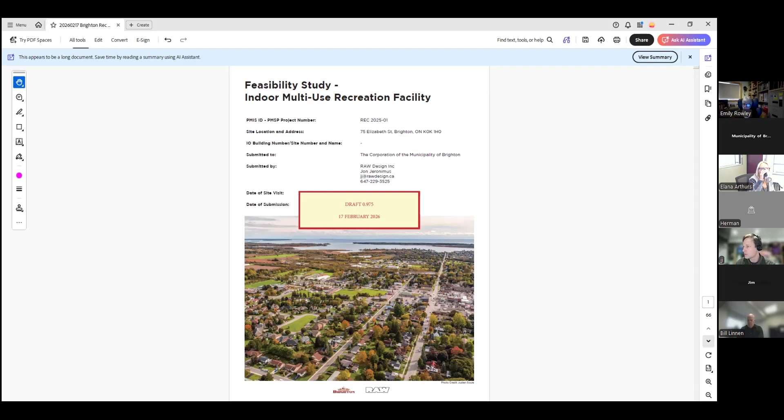Taking you through this report here, I'm going to go to the sections that have changed. Here's the 4.3 parking and site circulation section. We don't need to read that together right now. I think the highest value for us together is to look at the concepts and the money parts, okay? So just flipping through the report, we'll blow it up when it makes sense, just continuing through it.

I highlighted with some purple stuff, small sections that have been updated. For example, we had to do a better job of describing the indoor walking track as a potential area in the facility, so we've done that. Same with the elevator stuff for accessibility, and same with phasing, which we've talked about. If anybody ever wants to stop as we're going through this, please chime in, because otherwise I'm going to direct us to the areas that I think are the most important.

Even the YMCA stuff, we added a little piece of language to say any partnership model needs clear terms on governance, cost allocation, risk management, and overall transparency, based on our last conversation. I know that was an item that you raised, Emily, which I thought was a good item.

The functional program table, we haven't really adjusted. I think we still have to tweak a couple things in here, but the intent of this is really just to show here's what we think the need is.

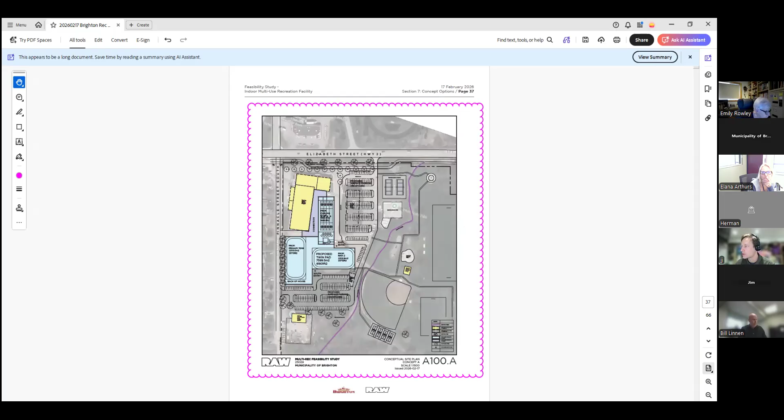Okay, concept options we're going to get into here. This might seem a little bit grainy in the report, but what I want to share, you guys can all see this, of course. We're going to talk about the concepts as they've evolved.

So let's start with this concept option number A, and we've actually since issuing this yesterday, we've added a couple more things. One thing we spoke about last time was, okay, the twin pads need to be shown. How do those work on the site? And how does the curling club really fit on the site?

So we've taken a 4-sheet curling club layout—and maybe just to back up, this is just a feasibility study that we're doing here, right? So the point of this exercise in mapping things out on the site is just to show how feasible these spaces and these rooms might be on the site. What does it generate for parking, and how does that work? There will be a whole design process where people will do an actual design. So I don't want us to get too tied into the nuances of how this building might function. It's purely feasibility analysis, okay?

So what we imagined was, okay, we've got the existing curling club in this dashed line. Imagine phase 1 is the light blue here. Imagine you move the ball diamond, which we've always talked about—we need that space. Move the ball diamond, there's room for it over on the other side of the site. And you build this kind of unusual shape here to fit the new proposed curling club in between the existing curling club and the existing arena. And then you have a twin pad built on the back. We've got roughly 10 meters between the existing building and the new building.

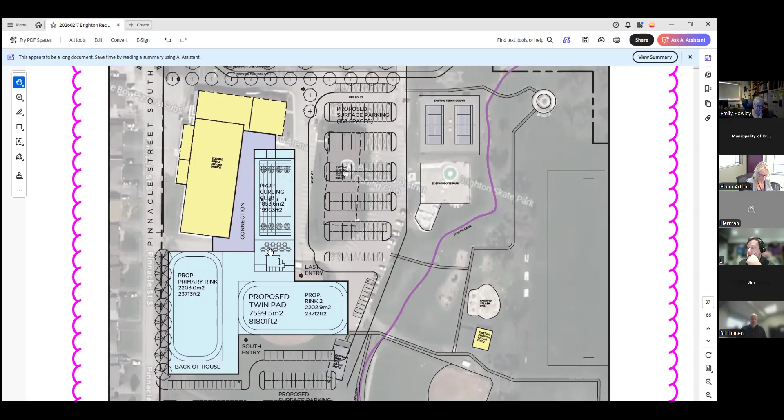What I like about this is, imagine the curling club's lounge can be worked into an overall lounge, where this becomes the central node where you can observe and be part of the life of these other sports and activities in the recreation center.

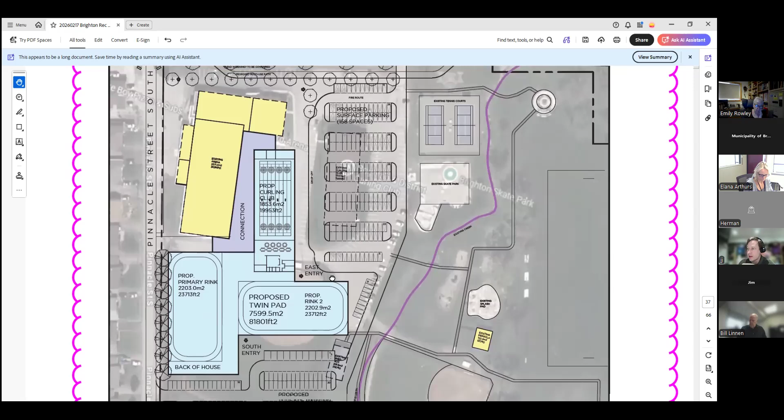And the existing building stays as is, with the opportunity to renovate as budget allows. We've broken that out. So with this scheme, I think we have something like almost 300 parking spaces versus the 190 that are currently there.

Can I step in for a minute here, Jon? Absolutely, yes Jim, go ahead. I was doing the numbers because of what we said last time, and I'm thinking of a busy day with 2 rinks going and a curling club tournament — that would take 264 spaces just for the participants.

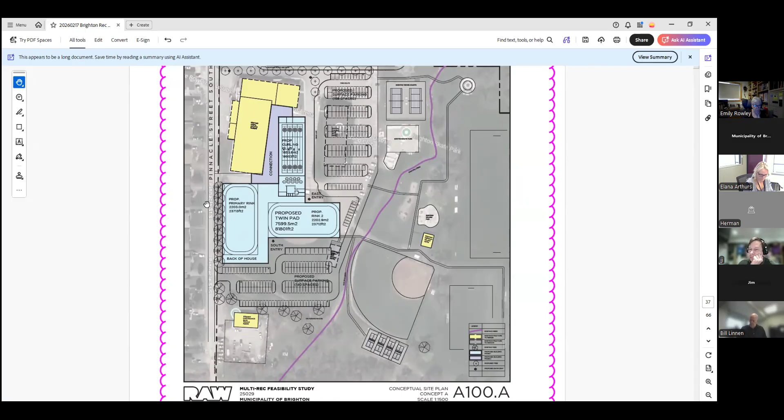Yeah, I mean, I hear what you're saying. The reality is I guess it means that 300 spaces will work based on your calculations, and you'll see in another scheme we get even more. But it's a good point, and we looked at how other arenas, how many parking spaces they have, and we spelled that out in the document, just why we think this can work. But to your point, it's going to be busy.

Are you saying, Jim, that you're concerned it's not enough spaces? Sorry, like 300? I think Jim just fell off the call. Oh, no, he was so mad about the parking that he just hung up. Yeah, okay, we'll get him. We'll sign him back in. So if we could just pause for a moment, because without him, we don't have quorum for the meeting. Okay.

Yep, all good. Jon, yeah Herman? I have other concerns. Never mind, I agree with your statement on the parallel rink surfaces.

But my concern is that you're showing parking to the east of the east-west rink, and just on the south of the north-south rink, which doesn't leave any spaces for servicing, for in-and-out traffic, for the ice equipment, for maintenance — you can't have parking all around the rinks. The north end of that rink will not be an option for refrigeration equipment, etc. So I'm a little concerned about the parking lined up just to the south of the one and just to the east of the second.

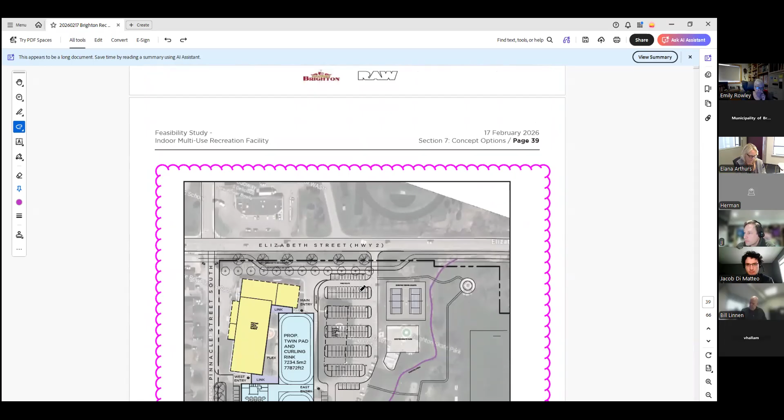Okay. Happy to reschedule if we need to, but maybe we give him a bit more time. I've offered for him to call me if he needs technical assistance, but I haven't heard back yet. I'm so tempted to just keep going, but I guess we shouldn't, hey? No, we should really wait, we shouldn't move forward without a quorum. Yeah, understood.

Herman, while we're waiting, did you get a chance to read through section 9? No, the one I received last night. I hadn't pulled up my laptop until this morning to get it set up for Zoom, and my problem with my eyesight and my cell phone is that it's all very fine, and no matter how large I make it, it's still difficult to read. Fair, we can go through it now.

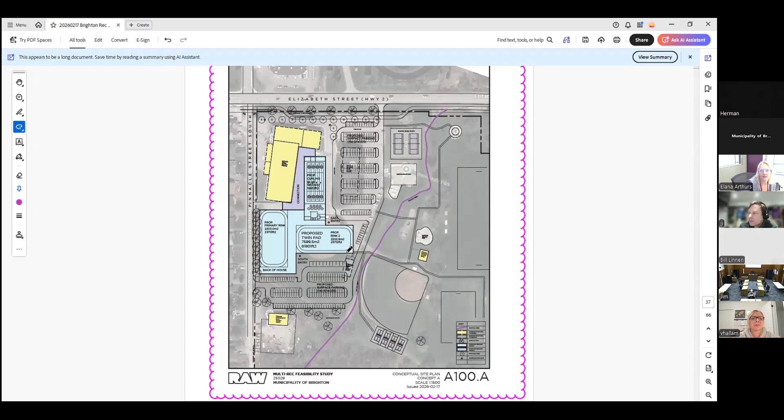Herman, are you back? I am, I never left. Rather than screwing around, I'll wait until I'm given the green light. Maybe we'll just wait a minute to see if Emily joins us. Did we lose Emily now? Well, she's there, I just don't know if she's back to the screen. I don't see her and she's on mute, so I want to make sure she's there before we get started.

I'm here, Jessica, sorry. Okay, excellent, all right, I was about to call you. We're good.

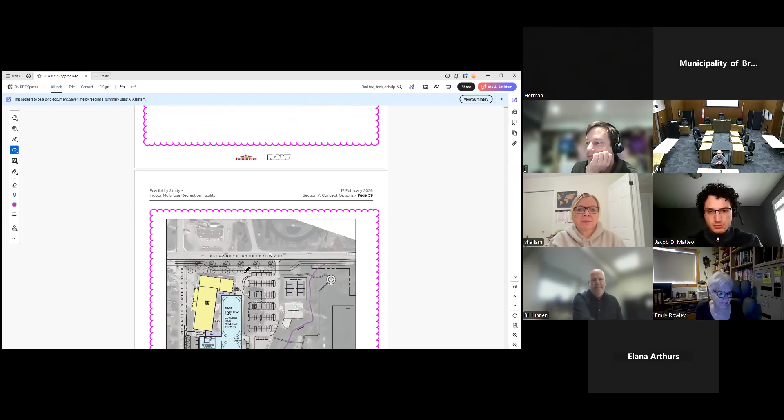So where we left off, we were talking about parking. Jim, while you were gone, you had mentioned your preliminary count of around 260 parking spaces required for a hockey tournament where both pads are being used. We were saying, okay, we've got 300, and there are going to be peak times where all these spaces are likely used. But what we're trying to do with this feasibility study is reflect the realities of what's required and what's possible on this site. From our research, we think 300 spaces is a good number to serve this type of facility, and we have some schemes where even more than 300 spaces are possible.

Herman raised the point that we've got to be mindful of the servicing requirements to these buildings, back of house stuff, loading, waste, all that stuff, which particularly in this scheme would be a bit problematic because of the location of some of these parking spaces that are flanking the conventional backs of the buildings where service spaces could be possible.

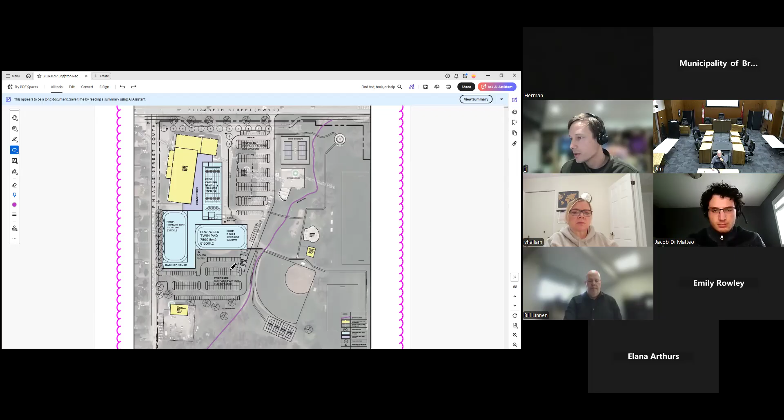But we kind of went over that by saying, look, this is a feasibility study, and we have to be careful about getting too far into the weeds of design. Our goal here is to show what is feasible with the number of parking spaces, overall building area, and zones of particular types of spaces in the multi-use recreational facility. So we kind of left it at that, knowing that the design is going to change and develop as this thing becomes real.

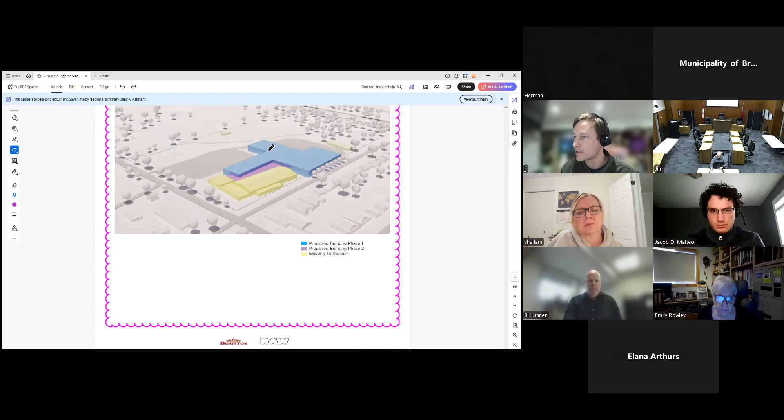So if it's okay, I'm going to keep moving along to show we've updated some 3D stuff. We'll continue to refine this. I know it's not really part of what we need to do in the feasibility study, but we think it's important to see in context in 3D what these shapes mean. And this is an unusual shape, and there's likely better ways of doing this, but feasibility wise, it could work.

We did another scheme, similar idea, with keeping the existing building, but showing a twin pad and a curling rink and what the resultant parking counts are. In this one, we've got the twin pads kind of back to back, but the same idea would apply. There's another option where the parking or the second pad is right beside this one, then you'd have this kind of arrangement.

Again, the feasibility of the remaining parking area is likely to be in the neighborhood of 300 spaces. Some could be here, some could be down here. It's just the organization of the space of the site. Can it achieve those goals? I think we're showing that yes, it can achieve the goal of twin pad, curling rink, existing building to remain, and 300 spaces.

I'll keep moving on unless there's any chiming in of thoughts. Here's another example of what that looks like in 3D without going too far into design.

And then we get to concept B, which is the one that has changed the most significantly. Last time in concept B, do you remember we had that civic court or civic square between the north piece of the building and the south piece of the building, which was cool, but it posed operational and efficiency challenges. So what we've done is we've reimagined concept B. Remember, concept B is the one where it's all new, where we phase the construction so it's all new.

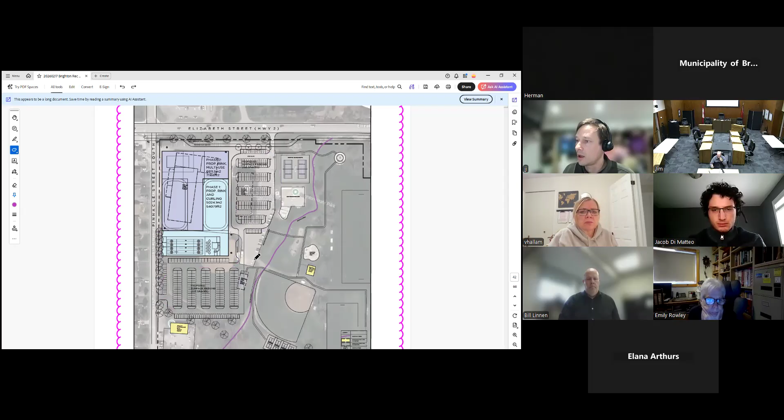Are there any questions as to the feasibility nature of concept B? Can you explain, John, where you've provided consideration for the YMCA, from a space perspective? When we talk about that extra space in the front, is there ample room there to put in things like offices or multi-use community space and the Y? Yeah, and I think that's a good question.

In this scheme, we haven't broken down into the specifics of design, but to give you a sense of scale, that rectangle is the size of a gym, like the size of a basketball court. The existing multi-purpose room is somewhere in this existing square. So there's a ton of space in this volume to have the in-skin, out-skin condition that the Y requires, because it also nicely delineates the ice uses from the non-ice uses. So in the scheme with the YMCA, perhaps this becomes the in-skin and the out-skin is all down here.

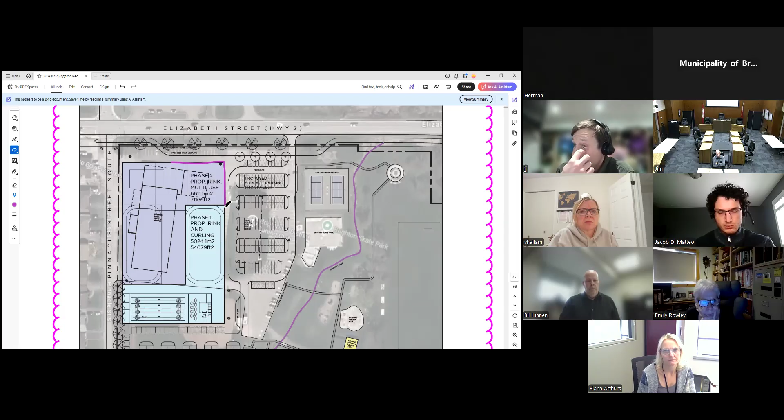Quick question, John. In that north section, if you have a gymnasium on one end where it's delineated there, and everything in the northeast corner could be your administration offices, but it could also be the Y working spaces. Would that be a two-story addition, because you've got a gymnasium that's basically the height of two stories, as well as both rinks? So would that be a two-story addition to accommodate a gymnasium where you've got volleyball, basketball, it's all high?

Yep, it's not going to be a single story drop-down roof, correct? Yeah. I think that's a great point, and it could even be described in the feasibility report as an option for consideration. Like the fact that it's new, you can go more than two stories. I know we talked about it in a previous meeting, but why not offices above that? So I think there's lots you can do when you create this as a new piece that you otherwise couldn't do with the existing buildings. Just one more reason to carry that out as a new piece.

And I know we've had some preliminary conversation, but I expect that we will have more of a push to really consider the library in this location. Oh man, that'd be amazing. Wow, it'd be amazing. And if it's right there on the corner, I think that would be so fantastic.

So, and any other, these are all great points. And Jacob, you're on the call right now, right? My colleague Jacob. Hi, everybody. This is Jacob. Jacob and I have been working together on this thing for quite some time here.

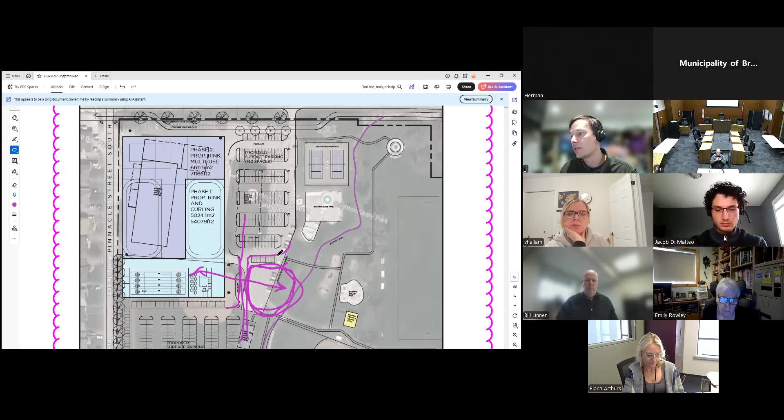And I just think it engages the park a lot nicer in that way, while still engaging the street. Okay, moving on then, if there's no further comments. And again, this one has the most parking.

Let's talk about, can we please talk about money now?

I'll go to section 9. So we rewrote section 9 to describe, okay, these concepts are a little different now. So we describe that concept A prioritizes new construction of core elements, being the ice and curling facility, and maybe it needs to include more, followed by removal of the existing curling facility and adaptive reuse of the existing arena building, but that some of those costs for the adaptive reuse can be deferred. So we have core costs and deferred costs as part of concept A. And then concept B is much more straightforward, just being a phased new construction with demolition.

So I'll try to, I don't know how much we want to really talk about this stuff and the specifics of it. These are some of the same construction cost benchmarks that we get from our Altus cost guides and things like that. And once you have those, you have the square footage of what's being proposed, it becomes much easier to spell out, okay, what does this mean in overall dollars? So we have here, just to describe the tables to you.